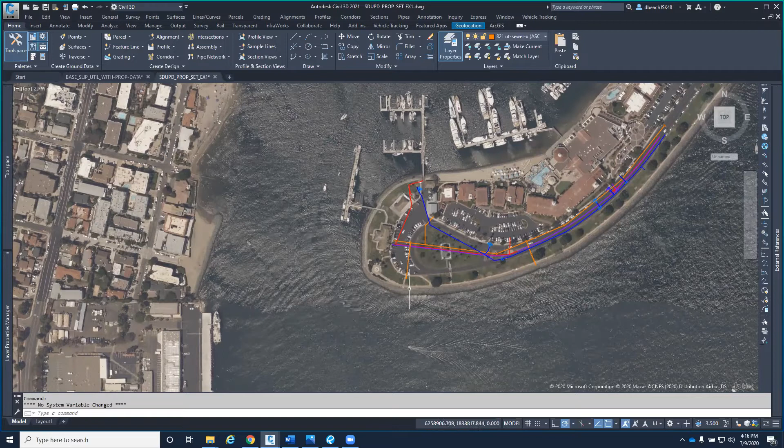So I'll just give you a brief look at where our utilities are. I cut it down, not showing all the utilities so the program doesn't crash. This is one of our shelter islands, kind of our pilot project, so to speak. Coming from past experience and previous projects, I know coming into design, stakeholders just really don't think of utilities that much. Typically, here's another port, not us, that I worked on in the past, and it's kind of like the utilities are shown here. These are electrical lines, just shown as a single line.

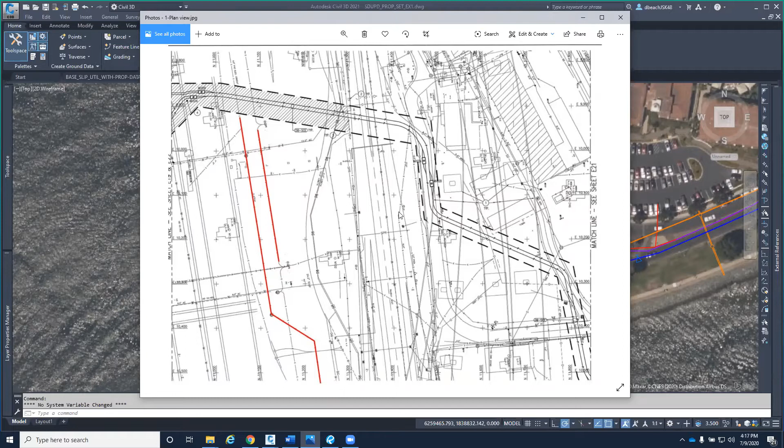Unfortunately, we learned this the hard way. This area was getting redeveloped, and these were all as-built drawings. So I started asking some electrical engineers questions like, what is in these lines? And come to find out, this is a typical cross-section of one of those lines, and these things get pretty big. This one here is represented as a single line, but actually consists of over 24 different PVC conduits that range from 2 to 8 inches.

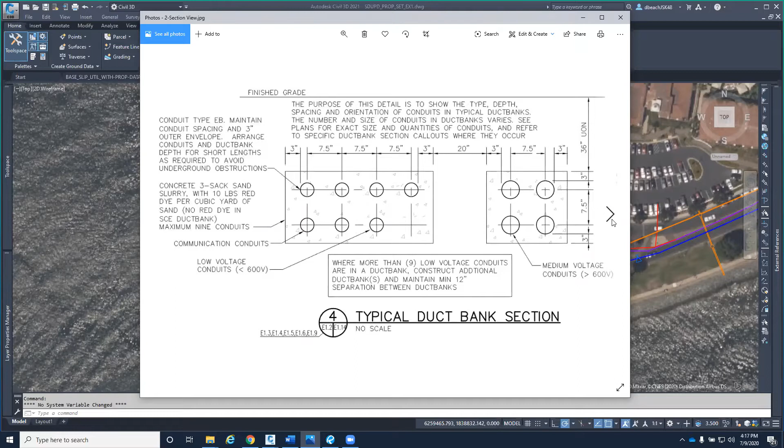Typically, electrical lines aren't usually profiled because they just say, oh, dig it 3 feet underground and call it a day. Well, this project, we had to profile it, and you kind of see the magnitude of these duct banks that these port districts are dealing with. These are 12 kV lines, fiber optic, and whatnot.

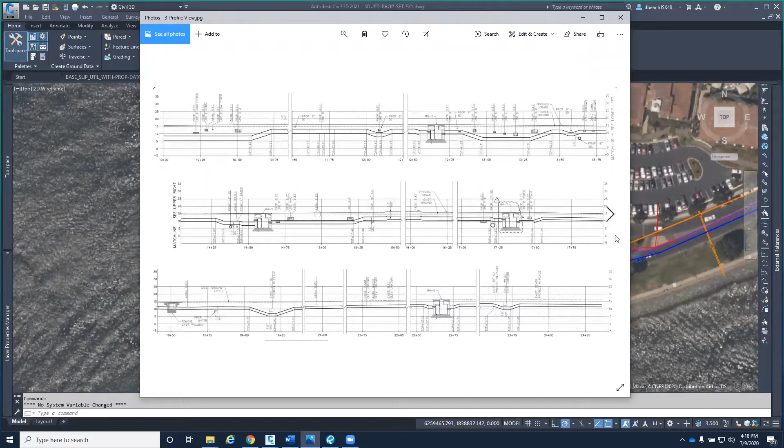In construction, that single line is what it looks like when it's being built. You may not think it's a big deal, you just put it in, but 25-30 years out when the ports are being redeveloped, they see this as a single line and think it's not a big deal. But in actuality, when they go out in the field and start digging this up, these duct banks are up to 6 feet wide by 10 feet deep, and they're concrete encased. It's a major change order.

So that's my past experience - let's avoid some of the risk when we go into construction, and let's find out where our utilities are. Not only that, let's find out who owns it, because we have 5-member cities, and the port doesn't own all of them. We have easements, and different cities will own certain utilities. So it's nice to know what we have.

So we reached out to a third-party consultant to do some field investigating. We used the ASCE SUE levels, subsurface utility engineering, to go out there and identify it. This sub-consultant gathered all our existing as-builts dating back as far as our data goes, and started compiling our base maps to find out what lines up with the as-built drawings and our utility base. The ones that didn't line up, or they didn't feel confident about, they went out and actually dug potholes to physically verify it. Sometimes they would just use ground penetrating radar to locate these things.

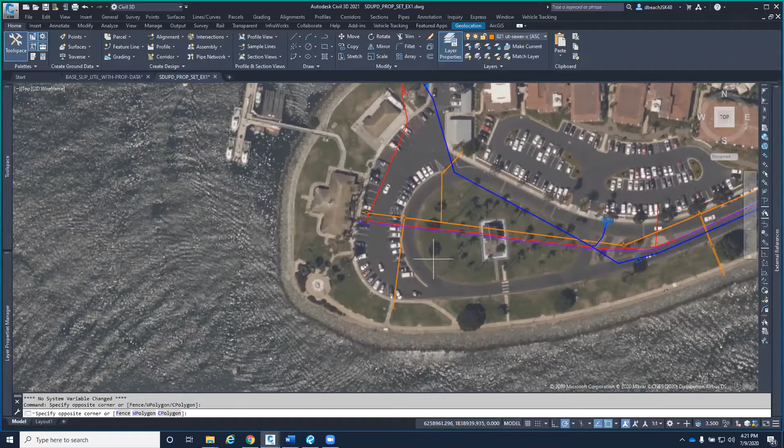So we used this as a pilot program, and with the help of ATG, I think we've been pretty successful. I thought it'd be a good idea to walk through how we actually added the asset management data physically to the pipe networks.

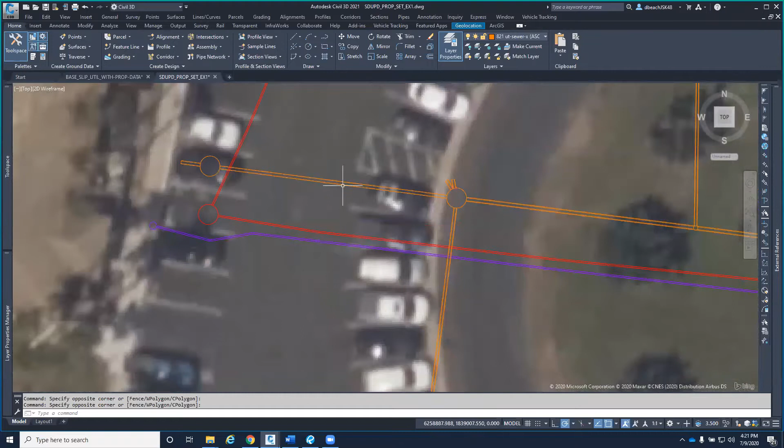So if you go in here, hit your properties - this is your typical pipe network in Civil 3D. In an asset management world, it's great information, of course, but it doesn't really tell us much.

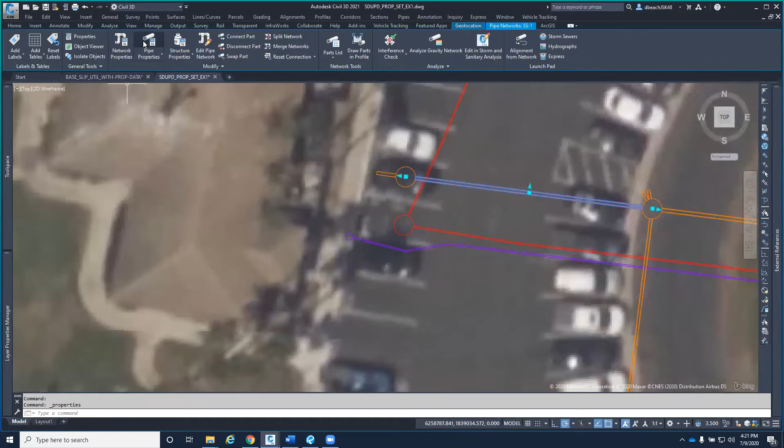So we figured out that if you go up to manage, define property sets, we can start developing data to add to this.

Let me say this while he's typing - Devon and I are not the PowerPoint type of people. We're not going to inundate you with boring slides. We're going to show you firsthand how it's going, what we're actually doing, our actual processes and workflows to get these things done. So there's nothing canned, or very little canned information, coming out of us.

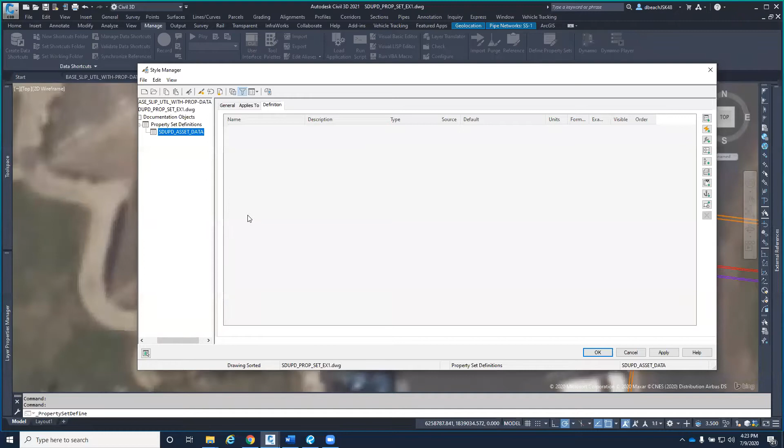So we started thinking about what kind of information we need for asset management, thinking 20 years down the road, if someone needs to access the data, what do you typically want. So we come in here and can start adding any information we want.

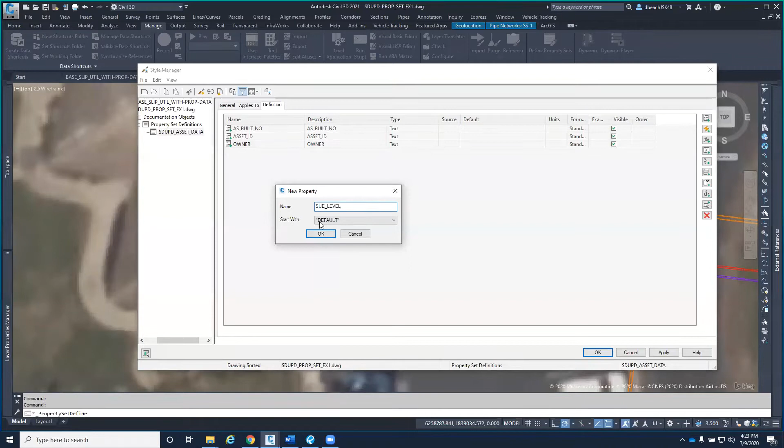So we can add as-built numbers, asset IDs, owner - I'm just going to go through a couple. We'll definitely do an SUE level, that's very important. And then just add a couple more - utility type. Don't mind my spelling.

Okay, and then you can start adding defaults to these. So we'll start with an electrical line. We're going to do SLIP electric, and asset ID will just be as-built.

What does SLIP mean, Devon? So when you're doing this, you've got to think, if you're going to be uploading your data to GIS, you've got to start thinking in GIS terms. GIS doesn't like dashes, likes underscores. This asset ID stems from our particular asset program. So when we use the asset program, everything's used by this asset ID, identified rather. So we'll start developing these.

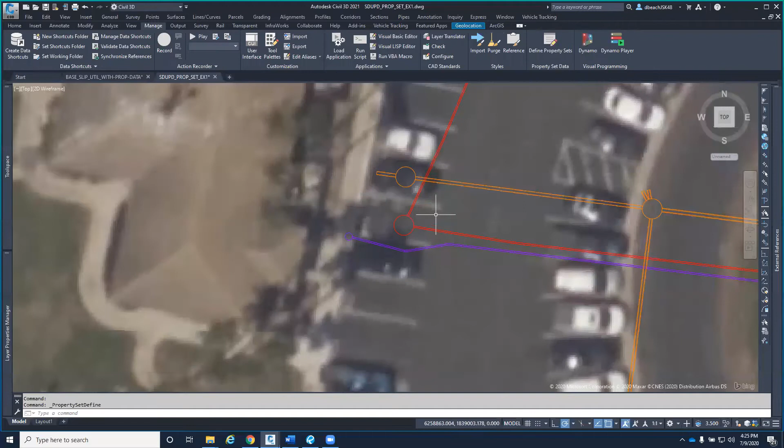So owner, we'll just say San Diego Unified Port District. SUE level, we'll just say B. Utility type, electric. Material, we'll just say a 4-inch PVC. Okay, so I'm just kind of setting defaults. Okay, and that's set. Now I have a property set that I can start attaching information to.

And when you start developing or adding stuff, in order to make everything talk with the asset management programs, we have to use that asset ID. And how we develop that is, I'll just kind of go through setting up a new pipe network. I'll just call this test electrical. Don't really have a surface. I'll hit OK, and this is how we start building.

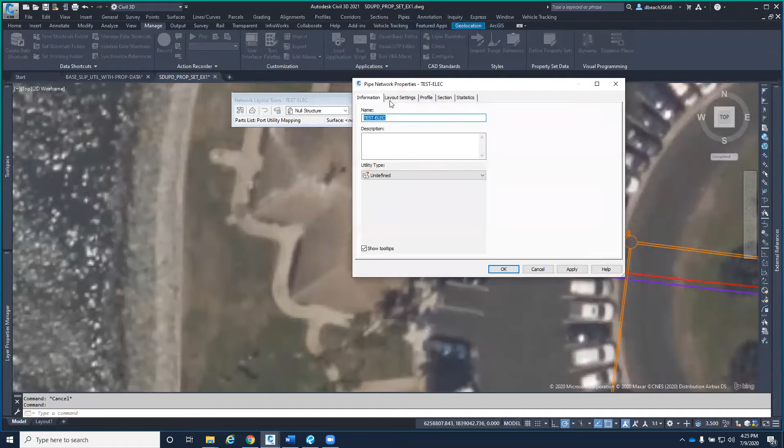So what we start is you go into the asset management program and you find out, okay, what is the next asset ID? That's where this comes in. So how we label ours is this is basically the area within the 34 miles. We have 9 different districts, and this kind of, the SLIP is one of them. Let's say this is electric. It's going to be a utility, and then E, and then the next number is auto-generated by AutoCAD.

So we go into the asset management or GIS, and we go through and say, okay, the last number is, we have 100 units already that is an asset that's tracked. So I'm going to start this at 101.

And then for structures, we kind of label them the same. This will be the kind of your planning district, electric, structure, and I'm going to say manhole, and then next number. And again, we had 102 already tracked assets, so our next level will be 103.

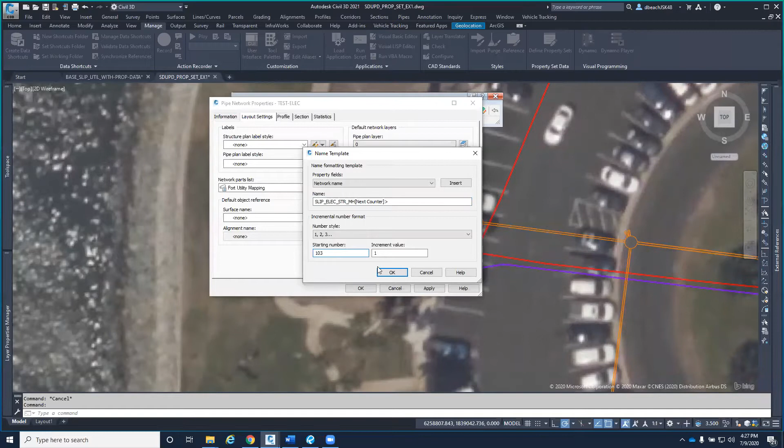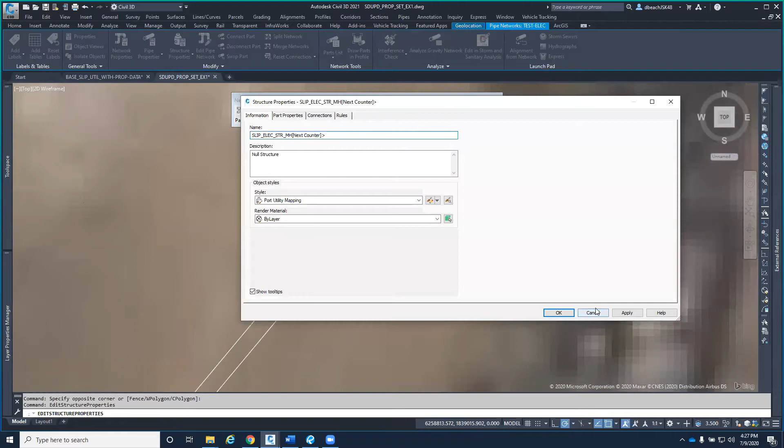And then I can just start building my network, and it'll automatically track those. So I'll just throw some lines. If you go into the structure, kind of properties, you should start seeing - next counter didn't, I screwed up somewhere, but that counter would start at 103, whatever I told it to.

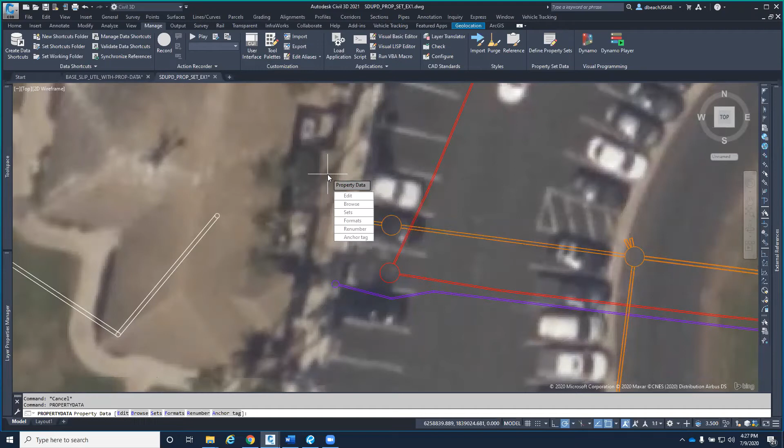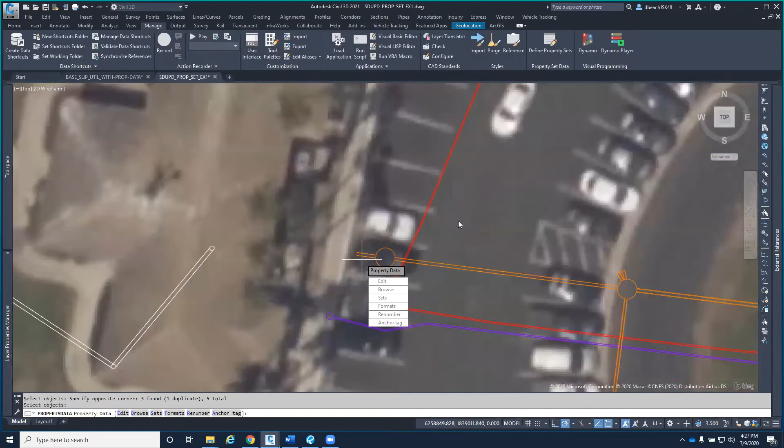So now we want to attach that asset data to each of the utilities. So I would type in property data and edit. I'm going to hit select pretty much everything - I'll just do a few here for the sake of argument. And then I'm going to click that asset property set that I just created. It's going to add everything in there and hit OK. Now when I click on here, go to properties, extended data, all that information is now added.

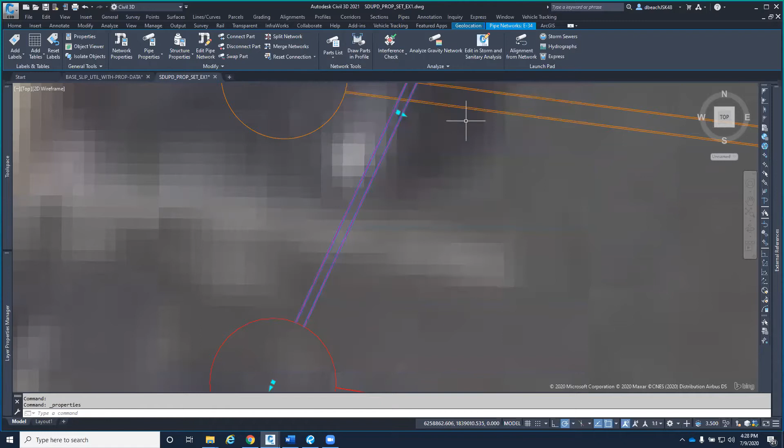And then when I go back to when I created, I would go to the next level. So I know this was 101. And then you just go each up, and you have to continue this step pretty much throughout. Then you go back to your property set. That's to say I wanted to, now I'm going to do a sewer, so I can change this to storm sewer, just say sewer.

Question for you. Go for it. Yeah, the property sets there, do you go in and just have one property set, or would you have a property set for each type of utility? So one for water, one for sewer, one for electrical, one for comms?

No, you can do one. That's what I'm kind of showing you. See how I'm changing the defaults now? Let's say this is City of San Diego. Let's say it's a well, and this is a sewer. So I'm changing all this, and let's say it's a different project.

Hit OK. Now I'm changing the property set that I developed. However, it doesn't change it when you already established in another utility. So I can go ahead and change his data. So you can have multiple property sets and apply multiple to a single entity.

So if you did have them set up for different types of utilities, you can select which ones you want to use. Or you can go Devon's way and change the defaults as you're setting up each and every entity that you're using.

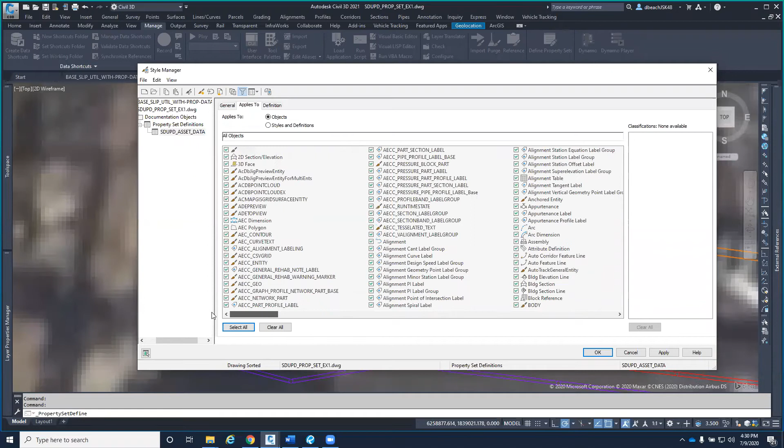But I think one thing when you're setting these up - go back in there, Devon, please. One thing you want to do is the three tabs at the top: general, applies to, and definition, and the applies to. Oh yeah, you can hit select all, so that way some entities will not natively accept the data. But if you do select all, then everything - Civil 3D, AutoCAD, all entity types - will be able to accept this property data.

Cool, yep, that's good. Yeah, thanks. So yeah, you see how I'm updating the defaults to go to a sewer utility, but it didn't update the electrical data that I just did.

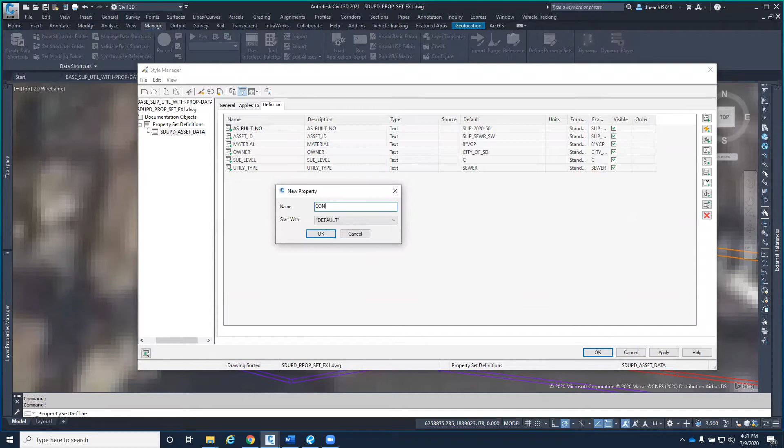It will, however, if you add any criteria. So if I want to come in here and add, let's say, construction date, that will auto-populate to everything that data set was assigned to. You can see it added it right here, but it didn't add the defaults that I changed.

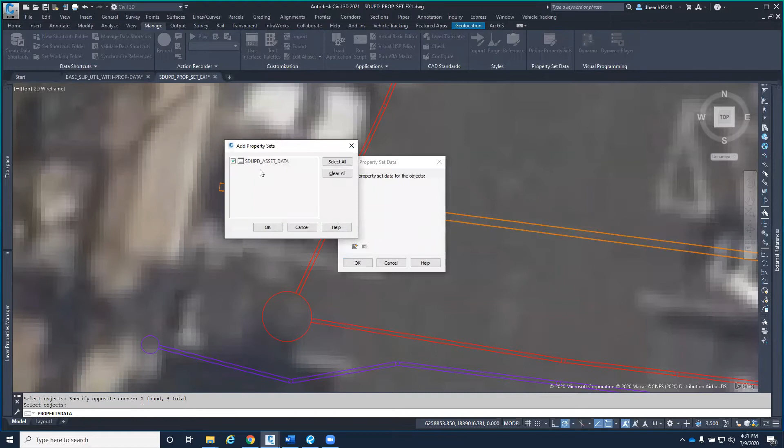So if I want to add that back to property data, edit, I would just select the entities of the sewer - select that asset or property set. And then when I go into properties, it has set the default, and I can just manipulate it. So I know this asset ID was - let's say this is the first time it's ever been constructed - so I'll just update it.

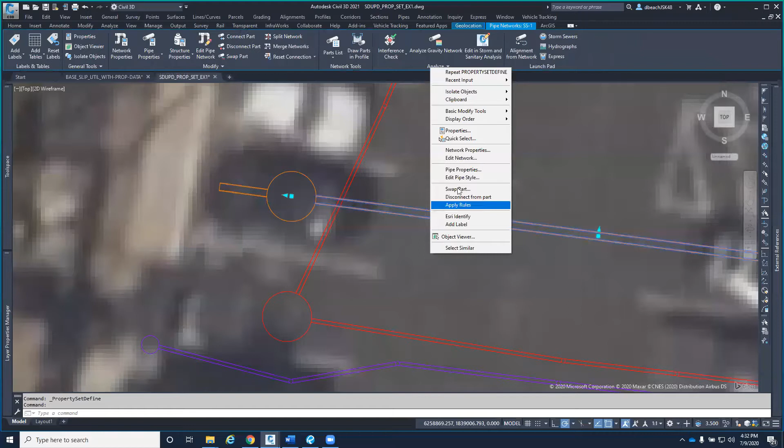So it's nice to know if you ever change the defaults and property sets, it will not change whatever you already had set. So that's how now when we transfer it over from Civil 3D to GIS, it will transfer this extended data, the property sets, with it.

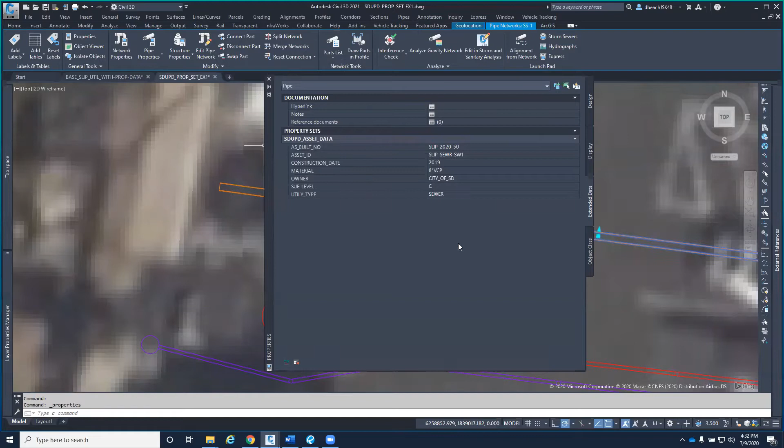You kind of want to keep these small, because where it says the SD, San Diego Unified Port Asset Data, it does bring that over. So it'll attach this SDUPD asset data as-built number into the GIS database. So you kind of want to keep those small.

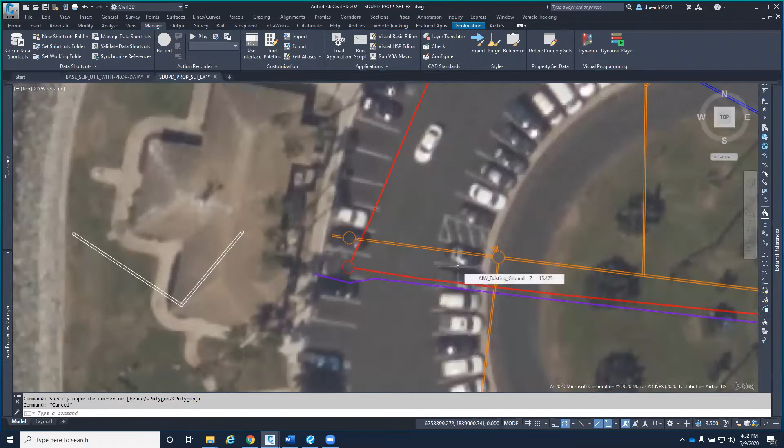And so that's how we added any kind of asset information that we wanted directly to the pipe network. And then I'll pass it off to Victor, who will talk about how to get it from Civil 3D to GIS. Well, before we make that switch, anybody got any questions, comments, thoughts, ideas, anything so far?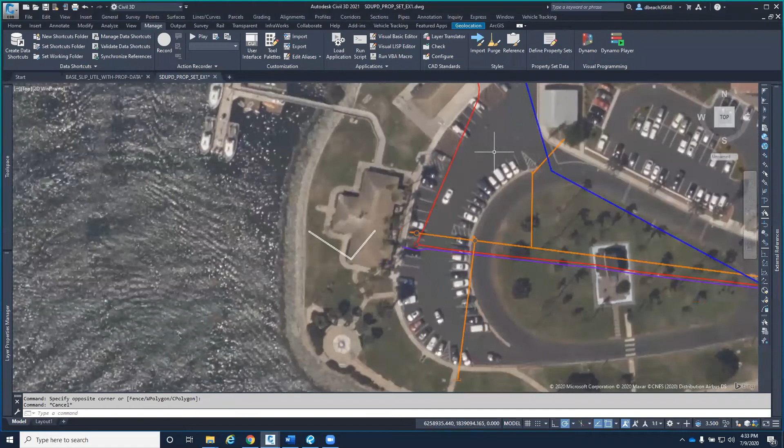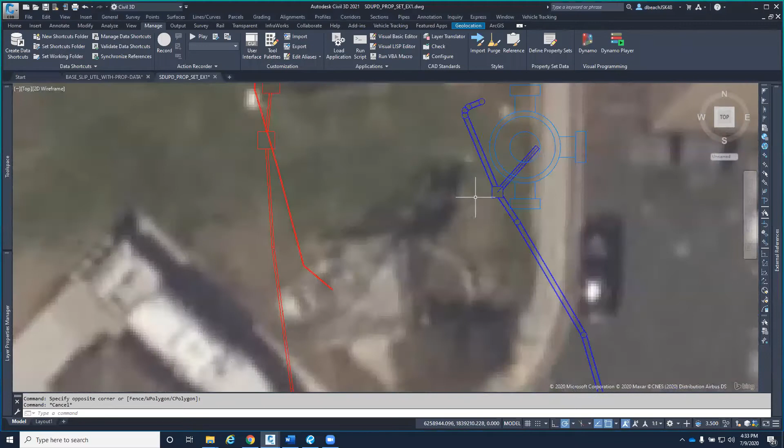So just you're applying this to using pipes. If you create a trench, obviously you would use a subassembly and you would compose it from some assembly. So you should be able to then attach that data via a corridor using a subassembly, so it's linked to actual entities within your drawing.

Okay, yep. So when you attach that property set data, if you right click on it and hit properties on it, then you can attach this data to it. All right, you've answered the question.

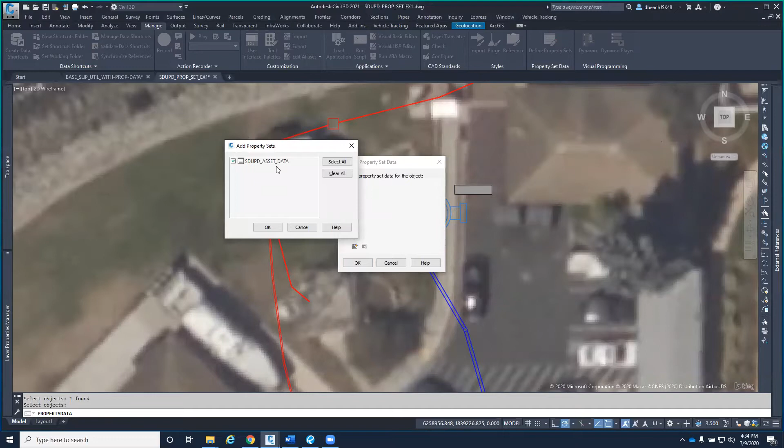That's perfect. Here's a block - right now this doesn't have anything attached to it. Yep, you just hit property data, edit, select. You can create multiple property sets - you just pick the ones you want, or you can add how many ever you want. And it will also add it to it.

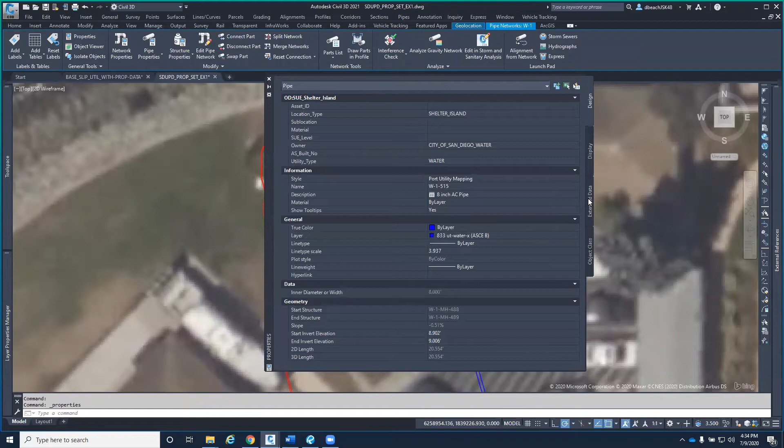Cool, quick shortcut to that is if you go into your properties, Devon, select one of the things - go to extended data, just right there in the bottom left-hand corner, you click that, add property sets. Boom, bang, done.

You could even streamline that and have a Dynamo script that actually has it in Dynamo Player for whatever service you want. You just press a button and off you go and run it.

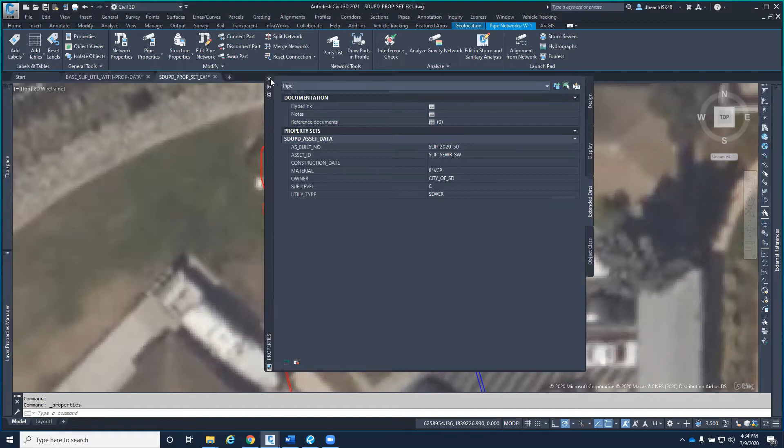So I'm hella lazy, so I'll select all properties and change it and just apply it to everything. Yeah, no, that's good, thank you. And then just sort them as I go through.

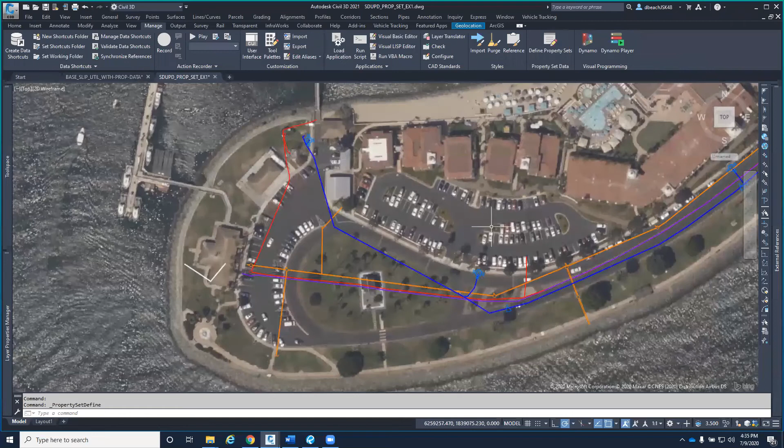Yeah, I find it easy when you're developing several different utility types is just change the default and then select all that - so just display your storm drain or just display your electrical and then kind of add the defaults to it. And then you can go in individually and revise the data however you want, especially with the asset ID numbers or whatever.

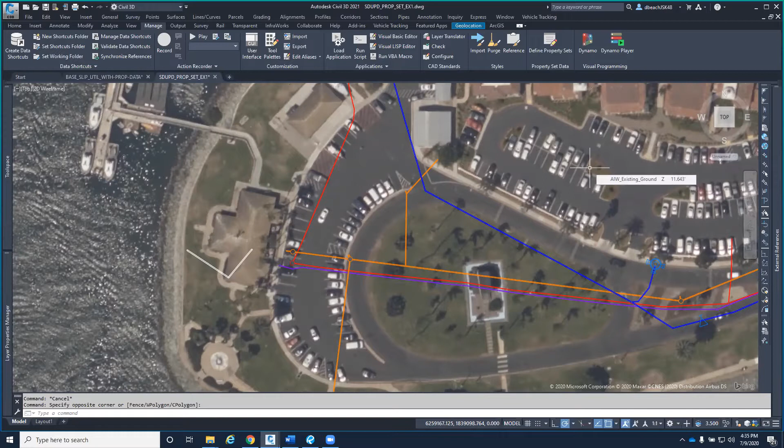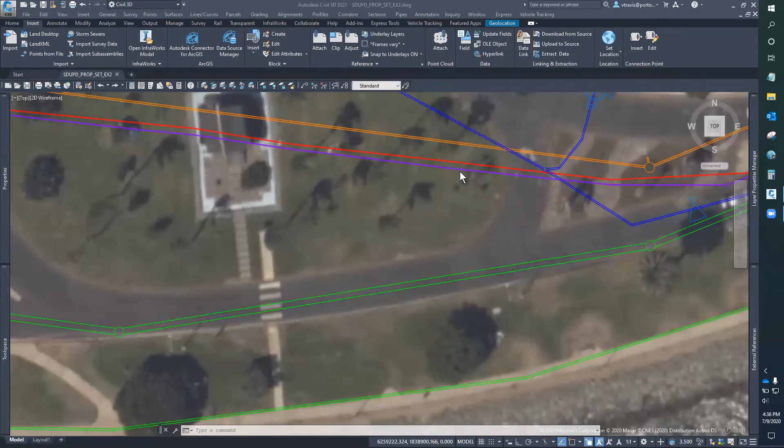Let's go here. There's a lot of stuff open there. Let's close that, I don't even need that open. This is my screen, all right.

So I've created a couple more lines in there based on what Devon's got going on. And I want to send this stuff to GIS, right? So what do I do?

It's a function of output. So go output, and we want to publish this to GIS. You're going to have to work with your GIS department to set up all this.

We had a hard time. Our GIS department was not very Civil 3D friendly. So working with them, getting specific rights assigned, making sure that we're not burning through all their credit and all that, we finally found a comfortable medium to where we can actually publish our stuff to GIS and be able to share it amongst ourselves, and in the future share it out to the general public.

One of the functions we want is, instead of getting the FOIA request, the request for information, it takes up so much of our time because we're a government agency. We wanted to make a lot of these things searchable by John Q. Public. Part of that is having a GIS application pointing public side, so they can look up information on themselves as opposed to putting in a request. That's also in keeping with transparency and all those other good, feel-good, fuzzy soft things we want to do out there.

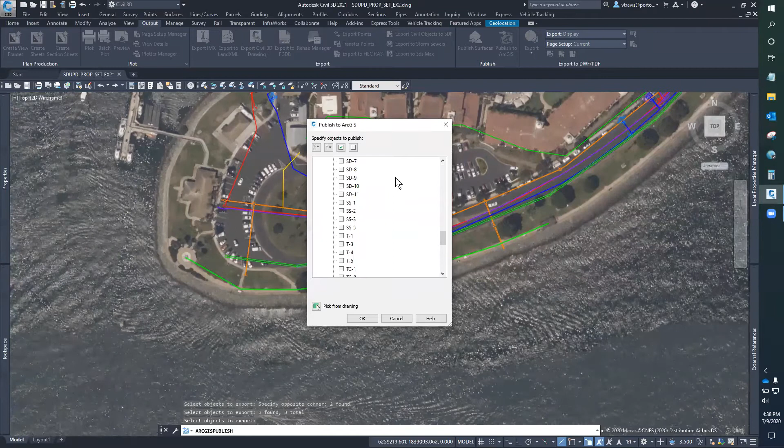So I go down, pick from drawing, and all you have to do is pick something from that network. You don't have to pick all the entities on that network because it's based on networks. So we'll say, oh, you want that network, okay, yeah, we'll pick up that network, and where are they at? Scroll down, we've got a lot of networks, and I just do not want to transfer all that data all the way across. So we've got 3, 4, and 6. Okay, I'm good with that. Say okay.

GIS wants to find that area of interest or that working area, because if you don't give it that, it's global. So it picks out the area that encompasses what we're doing automatically. That's the easy part.

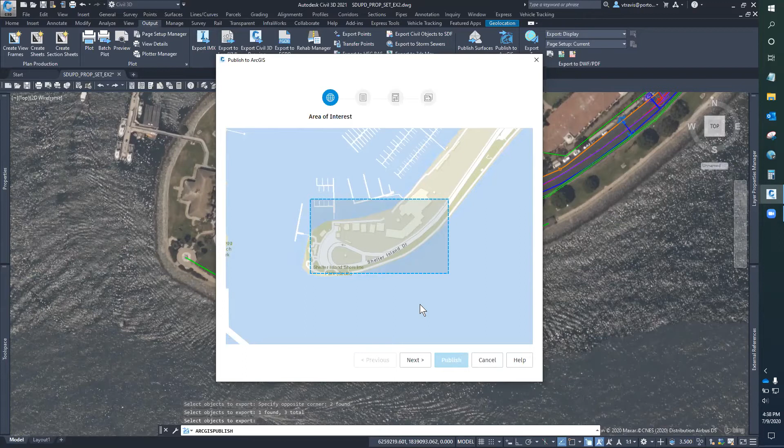One thing that was beating us down horribly is there's something within GIS that does not like the shape thing right here, so we have to uncheck it. Does anybody even know why that is? Our GIS guy says there's a shape parameter within GIS that can't be overwritten or something like that. It's beating me down.

Hey, this is Tom, I'm actually a GIS guy that works for an engineering firm. That's why I'm looking at this, and I can confirm that everything that gets built in GIS automatically has a shape field already there, and you're not gonna be able to override it. So your guy was right. I can confirm, oh, he let me know that he was right. You GIS guys are pretty good about that.

Well, we like to stick together, right? I'm all for it, and I appreciate you guys, but give us a little slack. We can set coordinate systems too, right? Oh yeah, you can, there's a lot of you that are better at that than I am, so I'm not going to worry about that at all. I just like to make pretty maps.

Let's be honest. So, were any of you guys at the Autodesk University? Victor, yes. Bill?

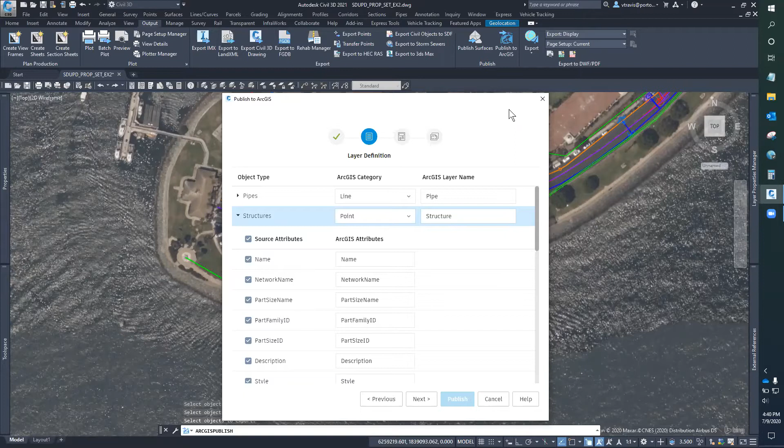Okay, thank you for letting me know about the shape thing. Maybe in the future we'll give it a different category. My GIS guy says I don't do pretty enough maps, mine is just down and dirty, I just want the information in there. He wants to set up rules for how everything displays and comes in. I'm like, yeah, we'll get to that. But we go from this step, make sure you uncheck the shape, go to next.

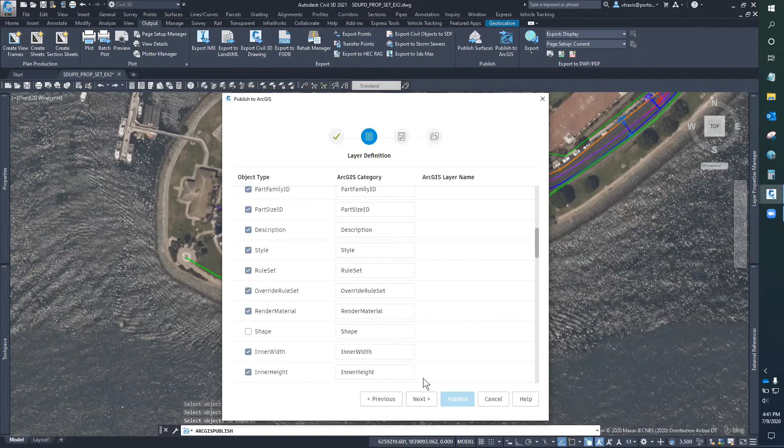GIS does not like dashes. So if there's a dash in the name of your drawing or the name of anything, it will not accept it. So don't do dashes, okay people? It wants to have tags, so we'll give it a tag, util.

Util test, we're good with that. Little Port of San Diego, we like that.

And the advanced settings right here is where we share it with whoever we're sharing it with. Right now I'm not sharing it with the public because it's not for public consumption as of yet. But if I want Devon to look in on it, or our GIS guy, I want to share it to San Diego Unified Port, and that's just internal. And then if we have other groups set up, but I'm not on that account right now. Then we go to next.

Hey, wait, if you don't mind, I got a question. If you go back, can you click to enable editing and turn that off if you just wanted to push the data out and have it as view only?

Yeah, I think right there where it says add, update, delete features, update feature, or just add type of thing, I think that's about the only option. Yes, I think that is the case. But I think to put it out to the general public, it takes credits.

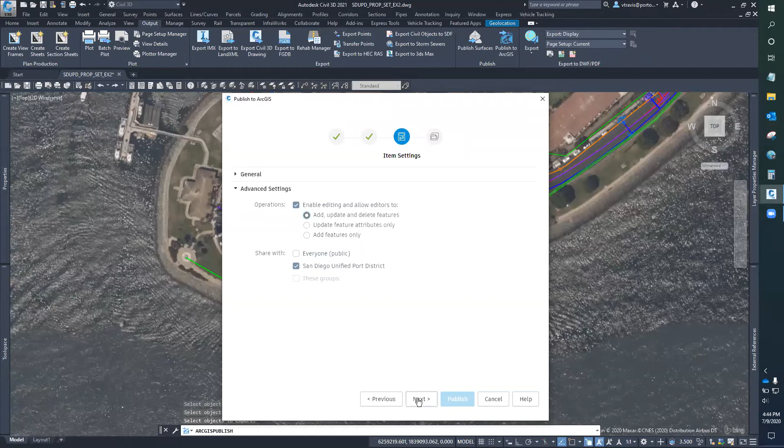No worries. And so I'm going to push it out to my content and publish the bad boy. And so this actually runs pretty quickly since I didn't do all the utilities here. And as I said that, it says oh no, we're going to drag. Oh come on, there we go.

And really simple, view in ArcGIS. It pops open a browser, signs me in, opens a map, and boom, we're in there, got my stuff. I click on a utility, and in answer to your question, here's all the property data.

Questions so far? No? Epic. And everything, so we've got structures, concentric structure, 36-inch PVC, 36-inch PVC on the other side. This one has nothing. Oh, that's horrible. Oh, there it is. The data for each one. Got questions? I'm not able to just go back and forth between the questions, so if you've got something, just speak up, all right people?

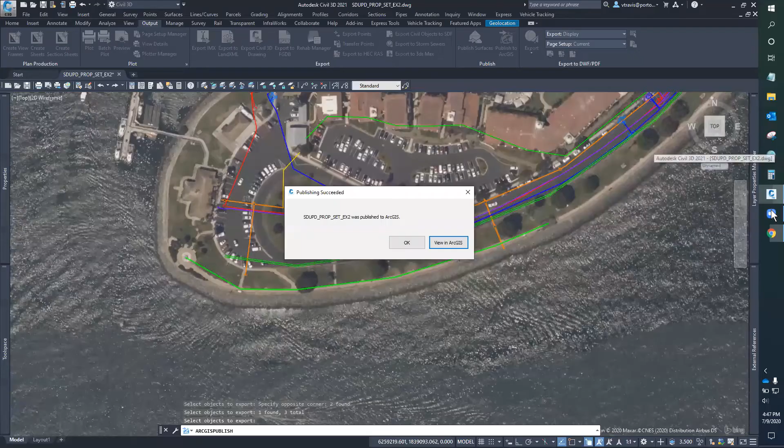So now all of this stuff is in GIS. What if I'm on the other side in Civil 3D and I want to use some of that information? I can come back to Civil 3D. I'm gonna do this quick — if I'm running too quick, let me know to slow down a little bit.

The reason we want it in GIS is just for the search capabilities. When a stakeholder says, 'I want to know how many utilities in this particular area the port maintains but doesn't own,' we can quickly go into GIS and determine that, where it's pretty difficult to do in CAD. Or we want to know how much length of sewer line the port owns within a particular area — that's where information becomes really handy with GIS. That's a much better GIS function than a civil function. GIS was made for running those kinds of queries and spitting back that information, as opposed to Civil 3D or AutoCAD.

If a person doesn't have a Civil 3D application, or they're out of compliance — like we're running 2021, if they're running 2018, they're not going to see any of our stuff, just because of Autodesk. So I want to bring in some of that rich GIS data.

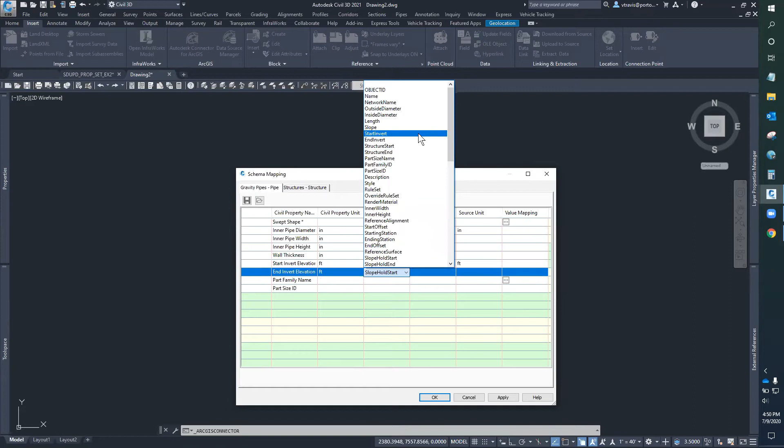We're like, cool — down here, just gonna add it to my design project. Now, as opposed to going into all these things, you can actually go in and set up, like right here where your invert is, just where it starts. Down, down, down — there it is, start invert elevation. Where's my end elevation? Right there, go through that, say okay, and it'll bring in that data. I did that wrong because I'm rushing, but you guys get the gist of it.

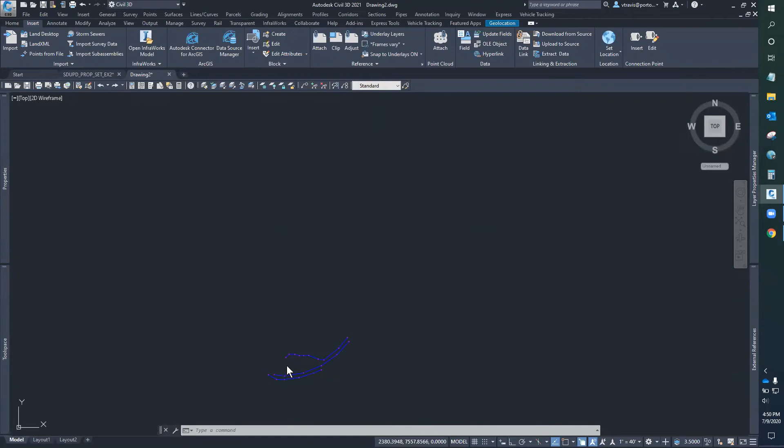And so here it is. I like to look at what I'm doing so I can see where everything is. Now here's the beauty of it — this is where we make this round trip.

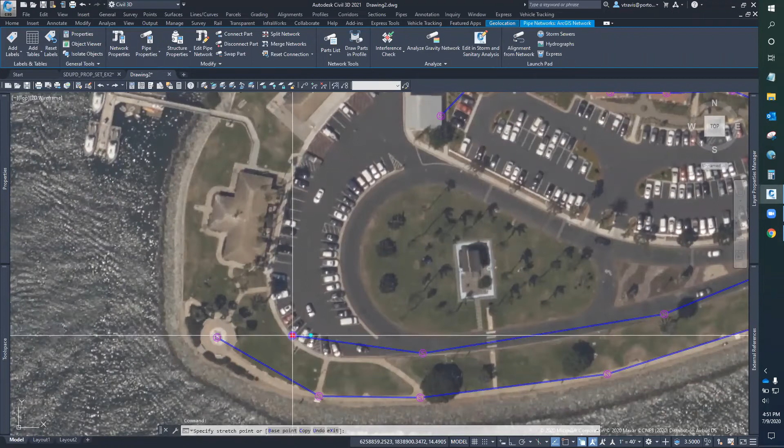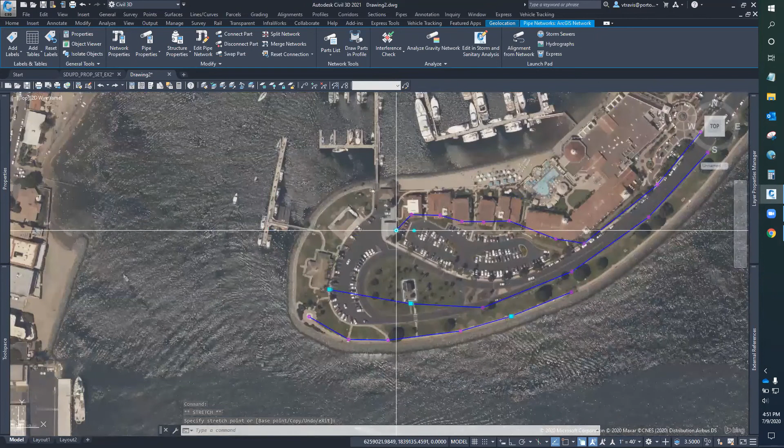We actually went out and got this thing surveyed, and we realized that this is not in the right place. We know it's right here at the corner of the building, and this one is over here in front of this building, and let's say this guy here is actually right here. So we make those edits — I'm making the edits real quick and easy, just as Mr. Bob Ross would say, pretty little trees.

We're done with that, and so we want to push that right back up to the GIS application. We come back to Insert, Data Source Manager — our data source was the GIS database. We click into there: the data source, ArcGIS data, pipes and structures, tells us how many pipes and structures we have. We say we want to save that back, and it asks, 'Are you sure you want to save that back?' We wouldn't go through all this unless we were sure about it, but it has to ask, right? We save it.

Victor, another question. Do the exported entities have to be live in the drawings, or can they be in an XREF?

As far as I know, and I could be wrong, I haven't tried it from an XREF, but I believe they have to be live in because you're working right with it. I don't know, as far as I know.

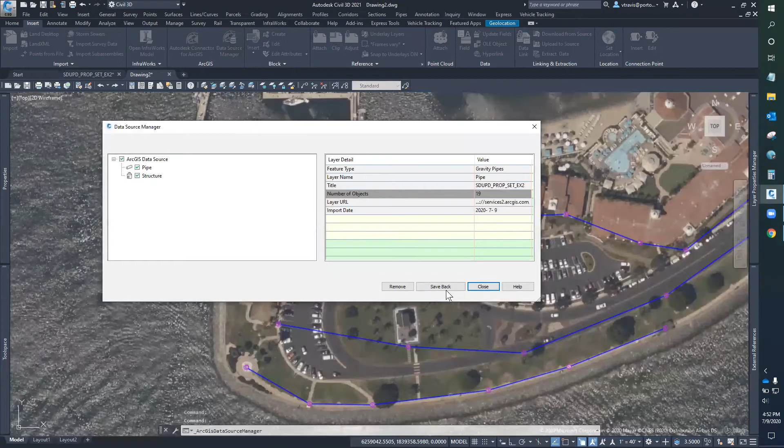So we pushed it back up and it went really quickly, really easily. And you can save it back as many times as you want. So if we come back to our GIS map, it refreshed automatically. I've got my refresh rate set right there.

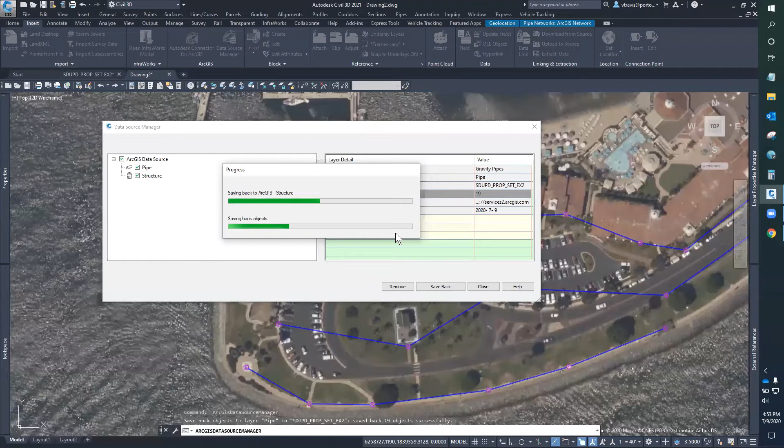As typical of me working with Devon, he'll say, Victor, you did that wrong, this goes over here. So go back to my insert, data source manager, save it back, continue. Close it, come back here.

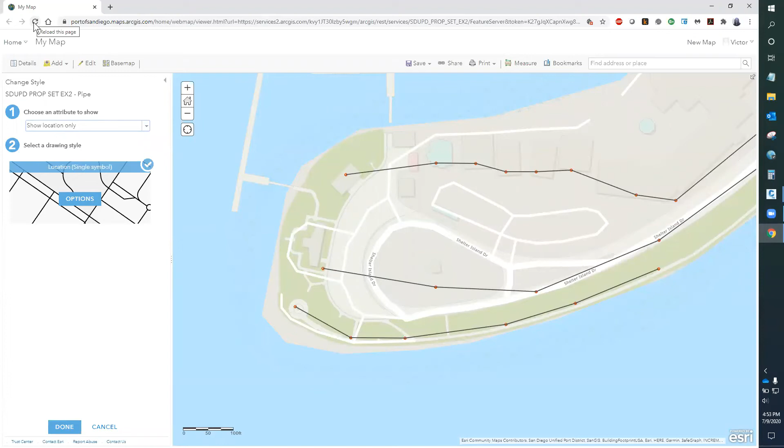So we're being impatient, let's hit the refresh button. And boom, changes right there. So that's how we can keep getting new Civil 3D data or updating our data, getting it pushed out to the GIS environment for others to

share and query and all that, and keep everybody on the same sheet of music. Even if we don't have the latest drawing, we can pull it down from GIS, make edits to it, make improvements to it, and then push it back out. So there's less points of failure. We can either do it from the Civil 3D drawing, or we can do it from the GIS database file.

We're good with that, people? So you're just dealing with a couple of pipe runs there. What happens if you've got large data sets? How long does it take to save back and push that into GIS? It's actually pretty quick.

Yeah, and there's not really that much of a lag. Even when I'm working from home, we have to VPN to get to our network and all that, and the VPN speeds drop off to a snail's pace. It still has not been unreasonably arduous. All right, cool.

If you do have a lot of information to share, with the GIS applications, you can do the website, the GIS maps and everything, and just make it very easily digestible to the public. That's a much better route than trying to stick somebody in BIM 360, or even worse, trying to figure out what PDFs to send to somebody.

Any other questions? Or any other thing you want to see?

I was curious about the other tab you actually pushed the data out online with, the one right next to drawing 2 where you've got the SDUPD prop set. I'm not a CAD guy, I'm GIS, so basically your second tab down there next to start, right next to drawing 2 here, that's where you pulled this data and sent it online originally?

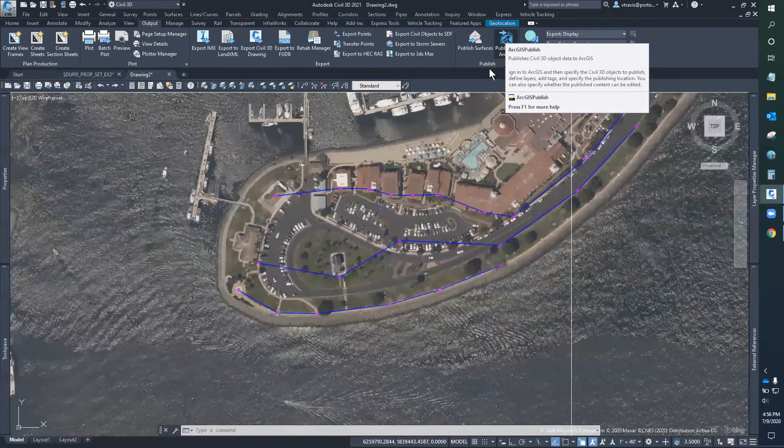Okay, so the published GIS. No, your other open tab over here, your mouse. Okay, go to your other drawing, your first drawing there. There we go. Holy crap, I'm dead.

So what you did there, that's obviously not updating this. How have you guys looked at it - if you're making changes in the GIS, do you then push that back to this, or do you start using a new drawing set like you did on the other one, where you're just using the data that's tied to the GIS?

It could go either way. So what I would do, since GIS doesn't particularly like being overwritten, I would go in - and it's going to be high level, it's either going to be myself or Devon, none of the other techs or anybody else is going to go in and change this data - but I would actually go in and get rid of or rename the previous one, and then send this up with the new common name.

Okay, cool. Yeah, because it's a different data set of the same data, obviously. So that was kind of my question, how you guys managed that as you were making changes to stuff and making sure that you're on the correct stuff, because it does get hard sometimes when we keep getting multiple data sets that are very similar. So, okay, right, cool.

And we're very new at this, and we wanted to demonstrate that this is possible, but there's a lot of limitations to it. We haven't discussed the horror stories and the sheer banging our head against the wall to get this far. We had a demo from Autodesk, and the guy was like, boom, boom, boom, this is how it's done, this is how it's done, this is how it's done. And like 75% of the stuff he showed us did not work for us.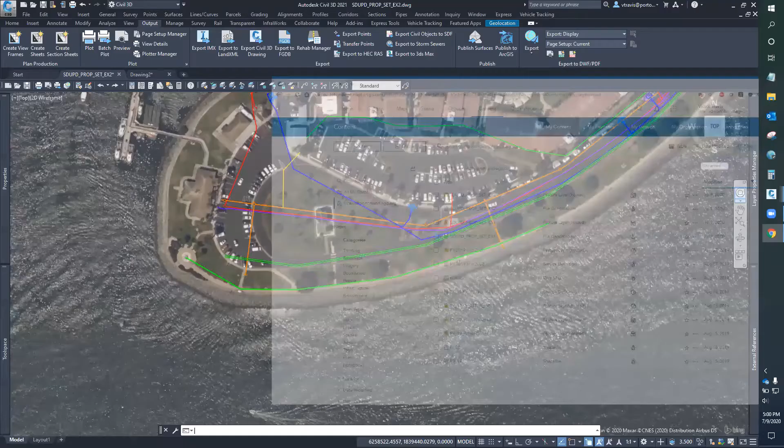I would love to really get into doing all that, but I'm just a CAD dude. Yeah, no, I was just curious because ArcGIS Pro, you were talking 3D, and that's part of the upgrade of the GIS side from desktop to Pro - it really handles 3D rendering. I'm not going to say seamlessly, but it does really well. So since you were talking about that 3D aspect, you could potentially run this stuff into ArcGIS Pro to do some of your 3D work there as well, if you had somebody or your GIS people could play with it. That was what I was kind of thinking.

Yeah. I would have to dig deeper into ArcGIS Pro, and that's not the top of my list yet. I have a feeling it's going to have to be in the very near future, but I'm going to be stubborn and not do it as long as I possibly can, because I already have a long enough list.

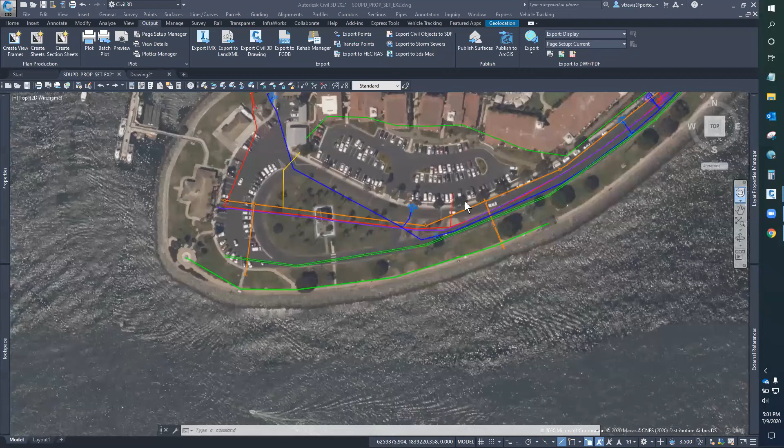So I got two parts, just to continue on from that last question. There's obviously two of you guys publishing to ArcGIS. Have you heard of anyone else working with multiple people, where different people are doing different elements and publishing that to ArcGIS? Is there any problem with multiple people publishing simultaneously to that? Have I heard of anybody else doing it? Not at all.

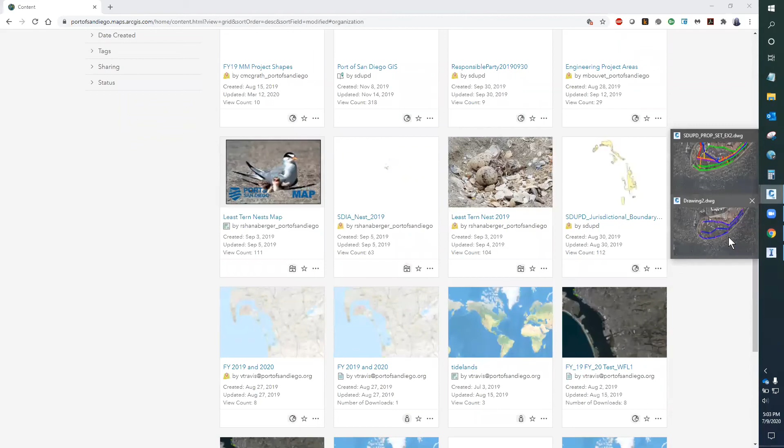And this - keep going. Oh, and if you notice, this is my content, but I can go to my organization - this is everybody within the San Diego Unified Port District that's working in GIS. And we also have had groups, not in this one. So even if Devon put something out, I can get his data into one of my maps. Or if I am in here, I can go to my organization, and everything throughout the organization, I can pull in data. So it's not just my stuff.

And also, if you guys are looking, there's also publicly available data, if you know where to find it and all that, but I would leave that stuff up to the GIS guy.

Okay, cool. And my second part is obviously you're going back and putting in all those utilities around that area that you had in Civil 3D. Are you performing clash detections on those if you're putting those in? And if you are doing the clash detections, where are you doing them?

Devon, we haven't really dove into clash detection when it comes to utilities per se. A lot of that can stem from if you create an alignment, you can assign these utilities to automatically show up on the alignment, and then you'd have to just kind of look at the profile or section views or whatnot to see if you have any, if you're designing a new utility within that area.

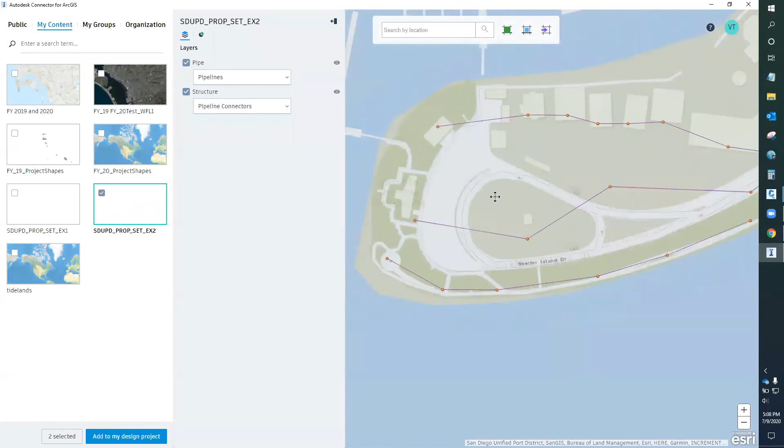My content, nope, not that one. This one. So, pipelines and pipeline connectors, turn that on. And keeping in mind that GIS is a live document, so our edits have been shown right there. And we just added to our design project.

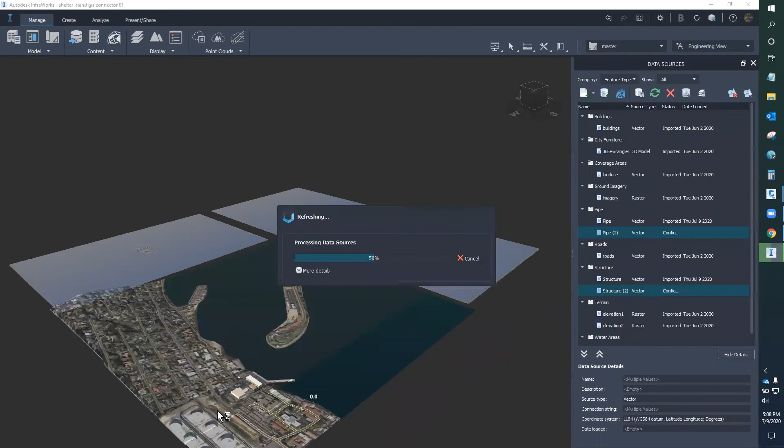And just to let everybody know, Victor is the king of InfraWorks. He's actually been told by Autodesk that he's doing things in InfraWorks that aren't possible. And I've actually kind of moved away from InfraWorks because I like other programs. One is Twinmotion, it's been really fun.

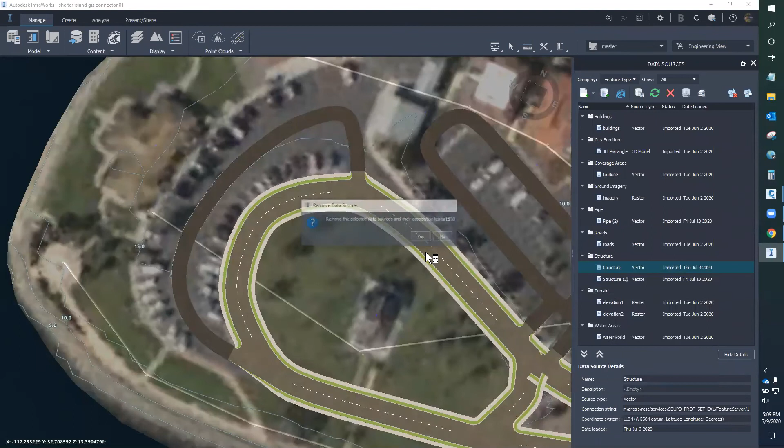But so actually, it looks like I brought this into this one before, so I can remove that one. Remove that one. My pipes aren't working right in InfraWorks for some reason, but just to let you know that it's possible to have them in there.

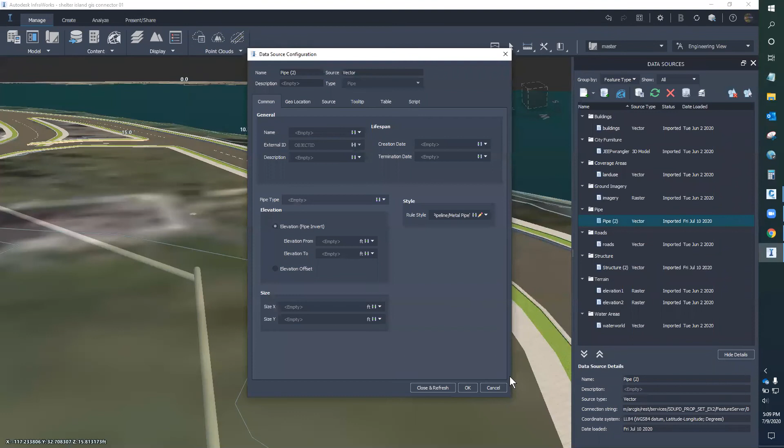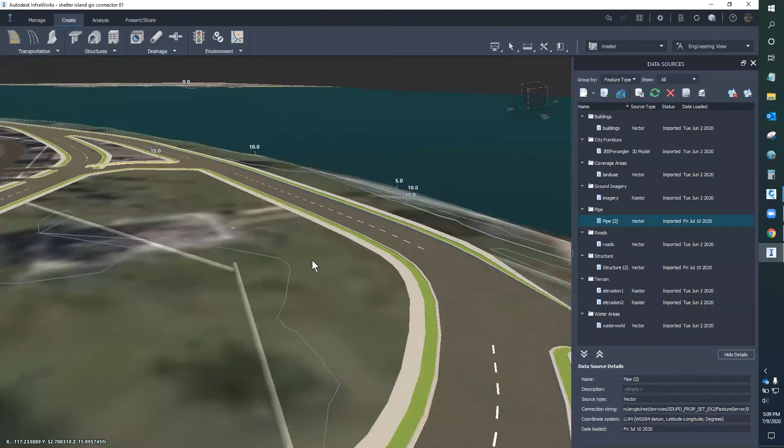With the IEs, and somewhere along the line I did not put in the right sumps and all that on these pipes. But just by way of demo, you can bring that GIS data into InfraWorks for some great visualizations, videos, and actually use some InfraWorks functions to create drainage basins and other functions if you were so inclined.

And if you needed to, you could bring a Revit model straight into InfraWorks right now. And it looks like you've got something over there anyway. Yeah, I think that's native InfraWorks stuff. But that could have been a Revit model to start off with, yeah.

It may have been, but when you go to bring anything into InfraWorks, you've got 3D models, which are Collada DAEs, your 3ds Max files, SketchUp files with its own SKPs, shapefiles, SDF, rasters, point clouds. There's a lot of work that can be done in InfraWorks for point clouds. You can pick up your ground data and feature line data from the point clouds. If you've exported your Civil 3D to a LandXML, or someone from InRoads sent you something LandXML, DGN 3D models, Revit, IMX - Civil 3D stuff is awesome, if this is going to work.

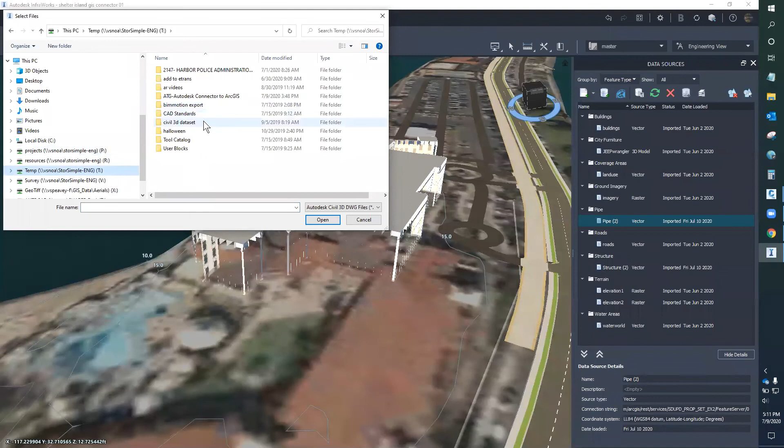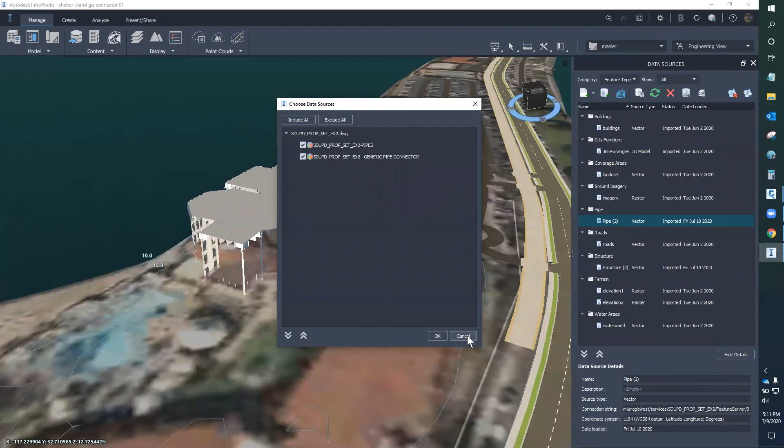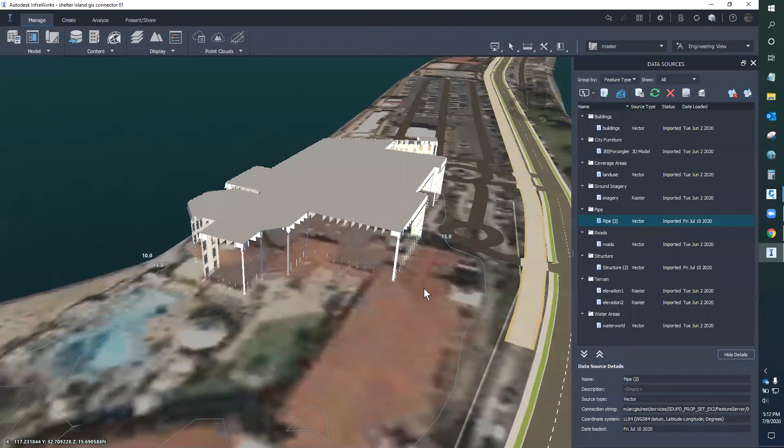That means if you edit the 3D model in AutoCAD, you can come in and reload that model and it shows the updates. That's just something you raised - obviously pressure pipes don't come into InfraWorks. Do pressure pipes from that model, if you use a pressure pipe on that civil model to bring into ArcGIS, do pressure pipes come into ArcGIS?

I believe they don't. They do not, right Victor? Yeah, I don't think pressure pipes come in yet. There's a specific function within pressure pipes that nothing else likes except Civil 3D. Right, okay. So maybe 2022 or 23 or 25 we'll get that fixed.

Another thing I forgot to mention is when you're building these pipe networks, if you're not using a pressure network, every time you have a bend it adds a structure. We just call them null structures, but that will be uploaded to GIS. So people may think, oh there's a manhole or pull box here because it shows up as a structure, but you just click on it - if it says null, you'll just have to keep in mind that's just an AutoCAD default, there's no structure that actually exists in the field.

Yeah, that's why I'm using pressure pipes, because I can put in the different types of bends. Yep, and they have the T's, but yeah, it does not upload to GIS. No, bugger - kind of damned if you do, damned if you don't. You can't go one way, you need to go the other way. Okay, cool, thanks for that guys, that's great.